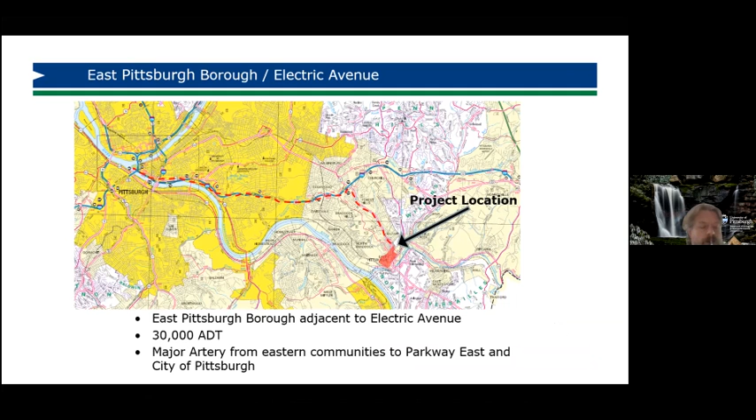And just for those of you that might not be familiar, this is in East Pittsburgh Borough, which is about 12 miles east of the city. Route 30 is a major thoroughfare for commuters, maybe not so much now, but they have 30,000 cars a day travel to and from the city. So I'll give you a little bit of brief background about the project.

Gannett Fleming has an open-end geotechnical contract, on-call services for the Pennsylvania Department of Transportation. They had been investigating a suggested subsidence condition out on Route 30. We were asked to come out and assist them with what was going on out there. So we spent a couple days, and within 2 days we identified that a retaining wall and the slope were displacing and it was not a subsidence event. We had some lateral displacement in both the slope and a mid-slope retaining wall.

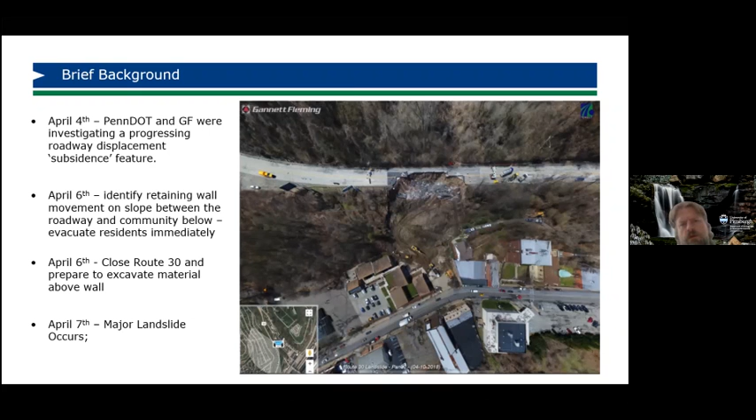So we immediately evacuated all the residents below in the local community, and then within hours of the evacuation, a catastrophic landslide occurred. Now, we won't go into the specifics of the landslide here. I'm going to concentrate on the technology used to accelerate our design and remediation. And like I said, here's a view of the slide.

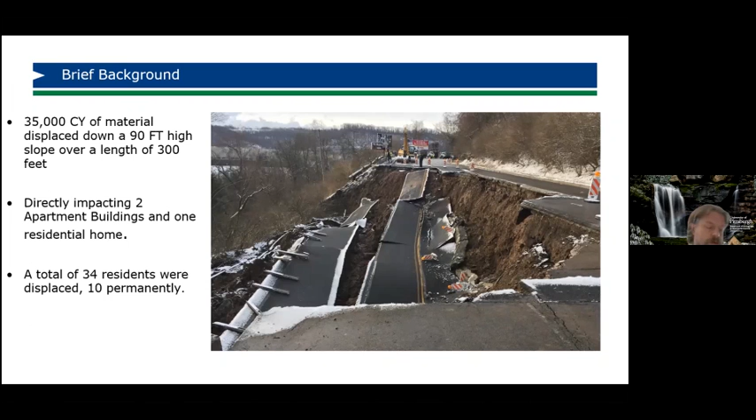35,000 cubic yards of material cascaded down over the slope, 90 feet high, and directly impacted 2 apartment buildings and severely damaged 1 home. Overall, a total of 34 residents were affected and 10 were permanently displaced. So what do we do?

Immediate actions. PennDOT has, again, an emergency contractor on call. They came to the site actually the night before it failed, when we were attempting to unload the slide at the roadway, and they began excavating material, but unfortunately the slide occurred too quickly, and so we went basically from an investigation to a remediation design.

Immediately the contractor switched from excavating the road to excavating landslide material, carefully going through some of the residents' belongings, etc. We also had PennDOT's on-call emergency drilling contractor on site, and with the excavation contractor and the drilling contractor, they began to do core borings throughout the slide.

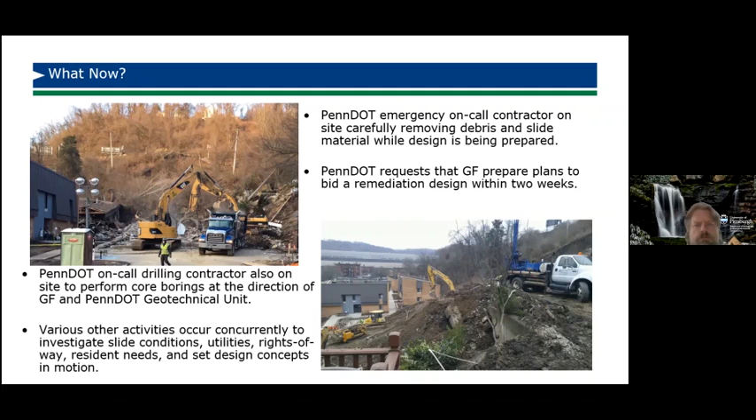And based upon some conversations with PennDOT, we had committed to put together the best set of plans that we could to remediate the slide and begin construction within 2 weeks. And there were other things going on like utility relocations, traffic detours, public relations, and of course the resident accommodations.

Now, for some of the technology aids we used to help us accelerate the project, as with the majority of our emergency slide projects, we typically rely on readily available LiDAR mapping that is available online through PASDA. And I give you the link here for your reference later. These are great maps for studies, but they're not necessarily survey grade. They give you 1 foot contours of whatever the latest mapping is of the area.

And this occurred in 2018, and you can see here the map was developed in 2006, so it's a little bit dated, which may be a problem in rapidly developing areas, but they were adequate based upon our reconnaissance of the site. The landform hadn't changed. So basically, I called the office, they downloaded the LiDAR cut sections, and they were laying on my desk that night when I got to the office.

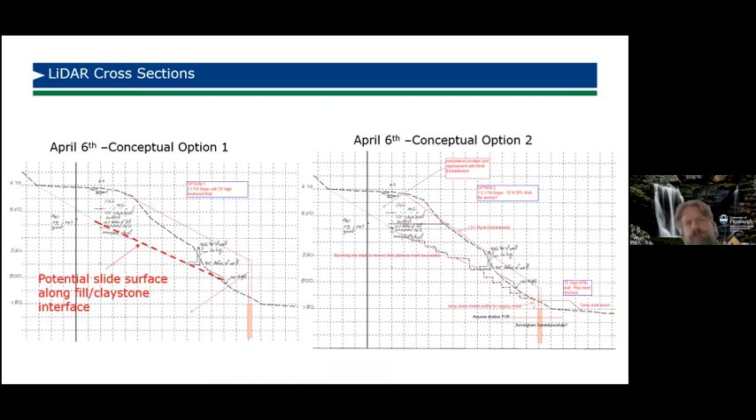So what did I do? I used the PASDA mapping. Here's the cross sections that we cut that day, and included information from the 2 partial borings that we were able to complete prior to the slide. And I put some interpretations on there based upon my reconnaissance over the 2 days on site, and came up with some general sketches of remedial options that we could pursue.

So although technology may assist you with advancing designs more efficiently, I just want to put it out as a reminder: the basis for a sound geotechnical design always begins with an understanding of the site history, including the underlying geology and the geologic hazards.

Now, fortunately, several of these resources are now available online through PA DCNR Geologic Survey and the new Allegheny County landslide portal. The links are right there at your fingertips. And you also want to look at any previous site development records or core borings that may be available from the owner or a local municipality.

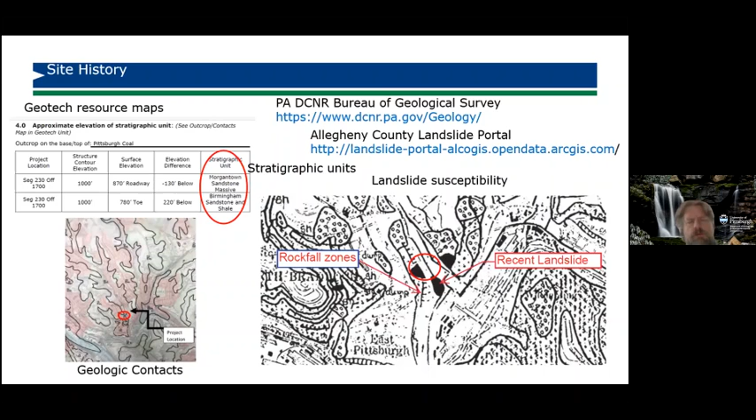Okay, so what do we do? We actually used drone technology to collect current site mapping. Gannett Fleming owns a drone. We had it out there within a couple of days, and the UAV collects photogrammetric views of the site, and then from there we can develop very dense 3D point clouds suitable for creating a final design digital terrain model.

The technology was very useful on this project given the unstable ground conditions and the steep terrain. Conventional survey would have taken weeks and would have put surveyors potentially in harm's way. One note of caution when using drone mapping, it must be tied to ground surface control points obtained by conventional survey in order to position the terrain model at the correct global locations. That way, mapping shared amongst survey teams can use the same controls, and we ran into problems here. That's kind of why I bring that up. I'll talk a little bit about that later.

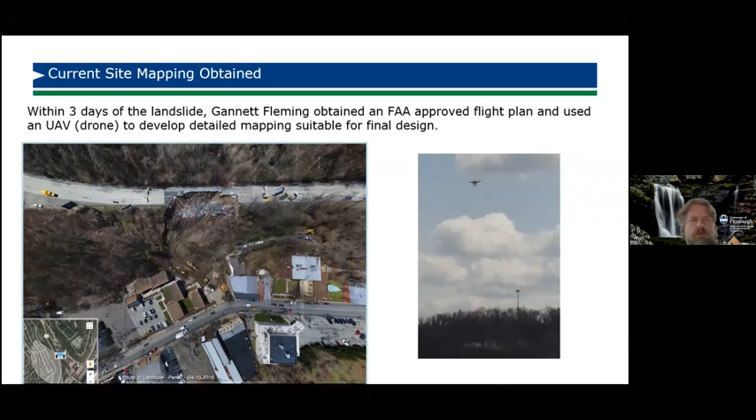So here we are using this available technology. We now have mapping of the pre-slide conditions with the LiDAR surface and the post-slide conditions within 3 days of the failure using our drone mapping. And this was very helpful in developing the geometry of the slide, identifying the magnitude of both vertical and lateral displacements.

Now, some of this technology that I'm presenting is now commonplace, and as Jim mentioned, 15, 20 years ago would not have been possible. Now, this stuff is widely used for social media, but we also found that these applications were instrumental in advancing our subsurface data collection and design.

We had core boring logs photographed and emailed to the engineers in the office as the data was collected, and core samples were photographed and sent via text with discussions of material, and termination guidance could be provided by the design engineer or modified in real time if we weren't hitting the material that we were anticipating. We could extend the boring. We didn't have time to go back, so these were very instrumental tools.

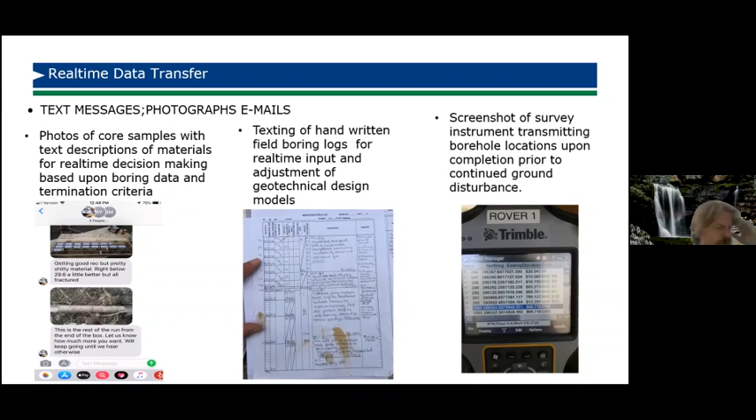The field survey of the boring locations was very important in real time because we had the excavators out there removing landslide material, and they were creating temporary benches for us to access with core boring equipment. And then as soon as the core boring was finished, we'd have the surveyor go over there and pick up the location and the elevation, so we could use that for developing our subsurface model. And then the excavators would come in right behind us and take out the temporary bench that they had installed just for the core boring operation.

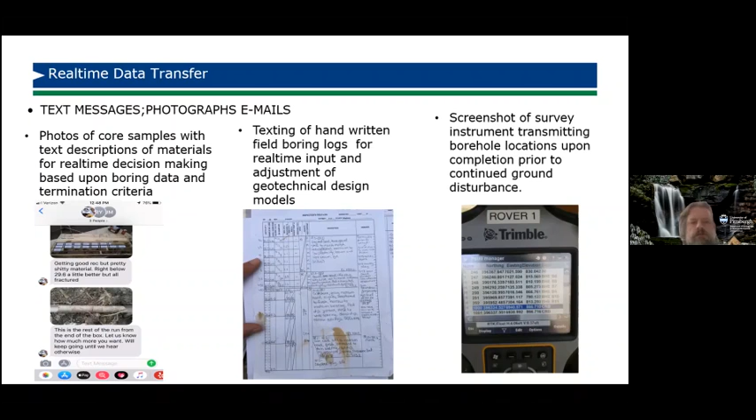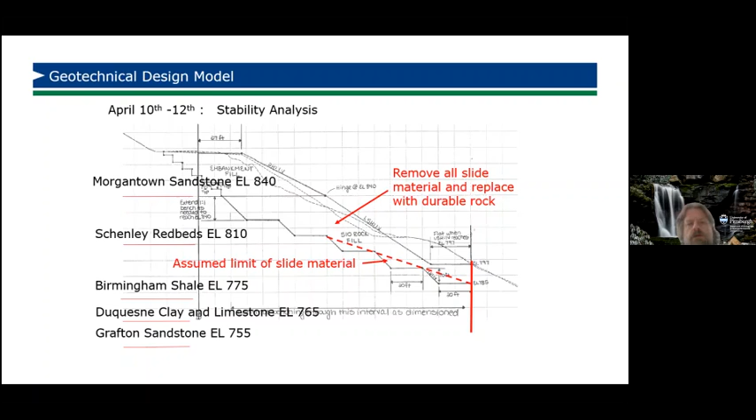So the use of all this technology, along with the nonstop around-the-clock efforts by the design team, PennDOT, and the emergency contractor, allowed Gannett Fleming to fully develop a geotechnical design of the slide within 5 days. And this is just a typical section with the geologic cross-section and the ground surface and some sketch of what we were thinking about as far as a repair.

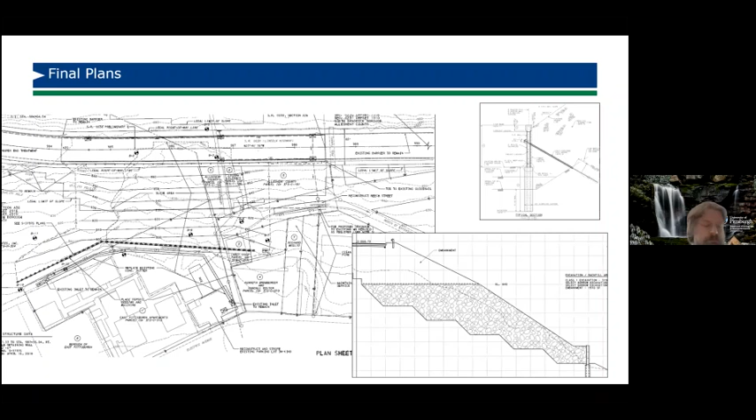And this is just an overview of what we actually designed. We excavated most of the slide material, replaced with a durable rock buttress, and erected a 20-foot high, 400-foot long anchored soldier pile wall socketed 20 to 25 feet into the basal sandstone, and installed 100 kip anchors, also bonded 15 feet into the sandstone.

So the contract was awarded, and Golden Triangle came out, and the first thing they wanted is our electronic files. So they requested them from Gannett Fleming, and they used our DTM to prepare an excavation benching model electronically, and the model was then uploaded onto a machine grading guidance system on all their excavators. So the models allow the equipment operators to determine in real time the excavation depths and positions, assisted by GPS locators mounted on the equipment.

Just real quickly, you see us standing around there on the one excavation bench. We asked the foreman, okay, I have the drawing in my hand. Where are we? So he had the equipment operator come over, put the bucket down. He said, okay, what elevation are you at? He could tell us right there on the spot whether we were at the design grade, above, below, etc.

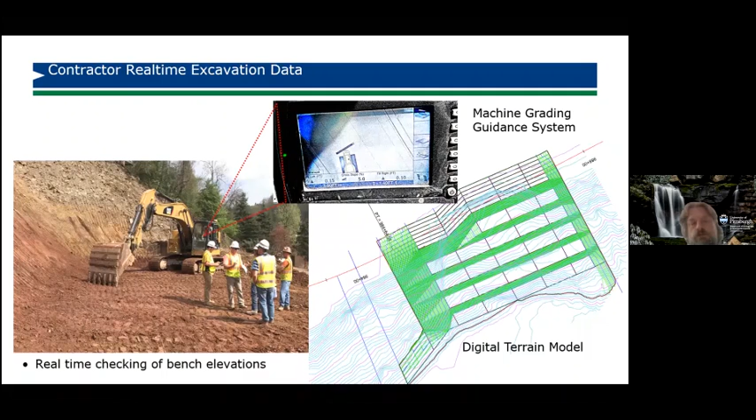Now, once that was completed, the geotechnical staff also had to go out and field verify the plan limits and modify the actual limits of removal based upon our visual observation of any remaining colluvium or slide material. And this photo just basically shows that we had to cut an additional 5 feet out of the design bench to remove some colluvium that still remained within the center of the old valley.

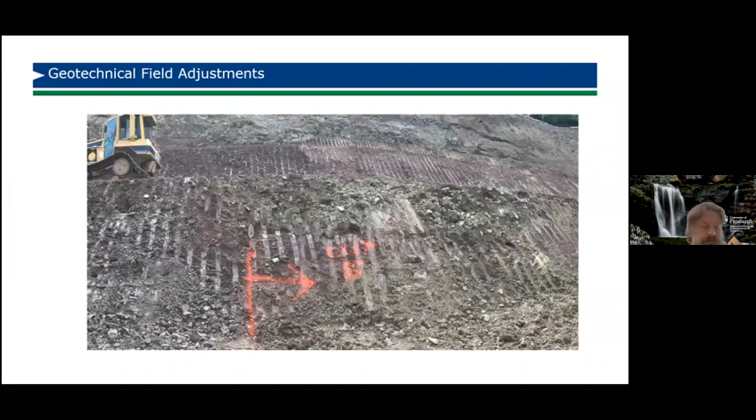Now, some of the other technology that was used during construction was also drone related. They used it as a construction monitoring tool. So Identified Technologies of Bridgeville provided UAV services. The drones were flown periodically to generate 3D maps weekly to track the progress and quantities for progress payments.

And this is where I go back to all these technologies, or the survey instruments specifically, have to be tied to common reference points. They didn't tie to our reference benchmarks or the contractor's, so their DTM model was slightly different than ours, so we couldn't track them exactly. But if they would have got on our monitoring points... there were some minor discrepancies, but that's just kind of a lesson we learned along the way.

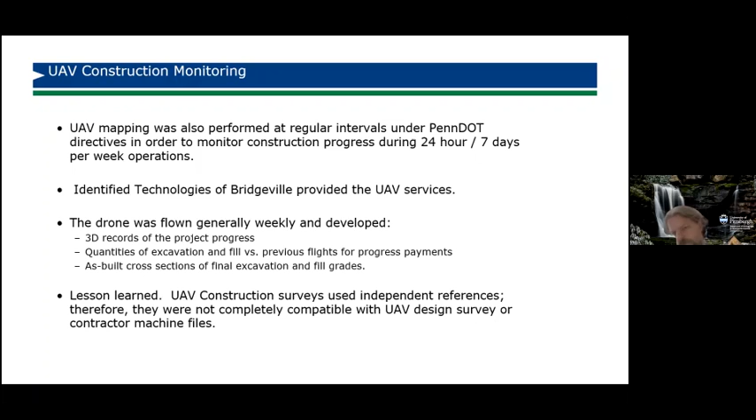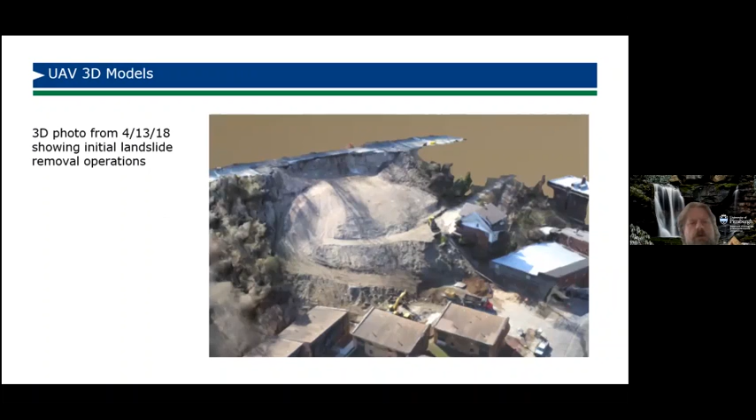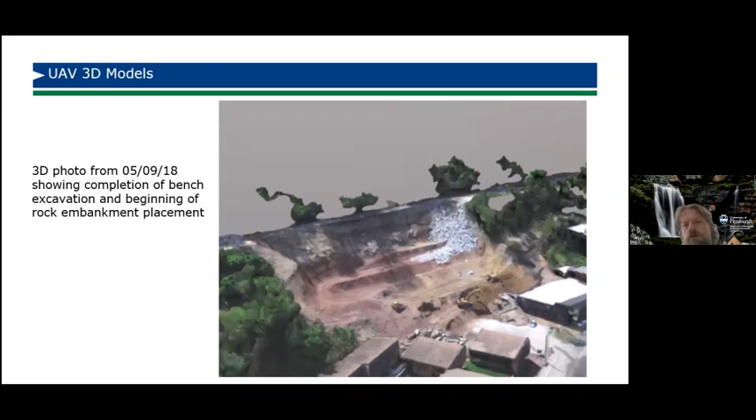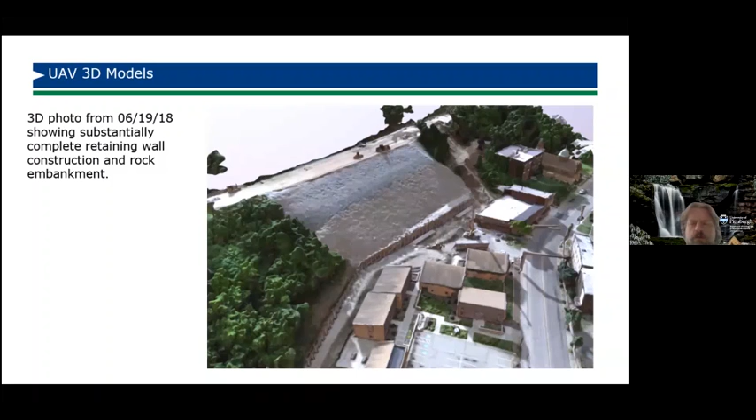These are actually 3D images. And this is a 3D image of the rock embankment placement and retaining wall construction. And finally, here's an image of the completed earthwork. Now they take these images and convert them into contour plots. The contour plots can then be compared through 3D computer models to evaluate change.

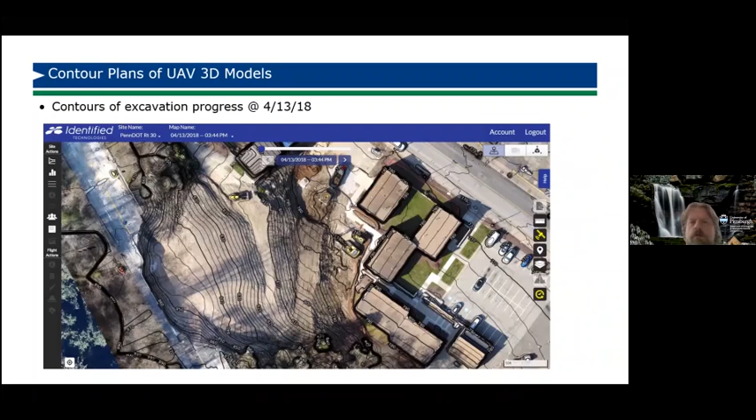This is a contour of the beginning again. Here is the completed bench excavation contours, and then finally contours of the completed earthwork. So they take this information and they can track volumes, areas, quantities, production rates, etc. And now they have an example. This is an example cross section; this was the original ground. Here's the excavated grade, and this is the final grade with the retaining wall at the toe.

And the comparisons also enable the contractor to evaluate the amount of resources needed compared to the completion deadlines. If they're behind schedule, they need to run more shifts, add equipment and manpower, etc. So they can evaluate that basically in real time.

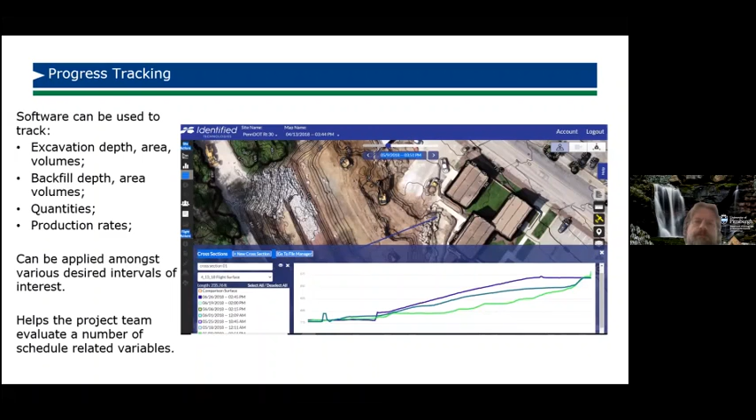Ryan, just a note, you're at 15 minutes, so if you... Yes, sir, I got 2 slides to go.

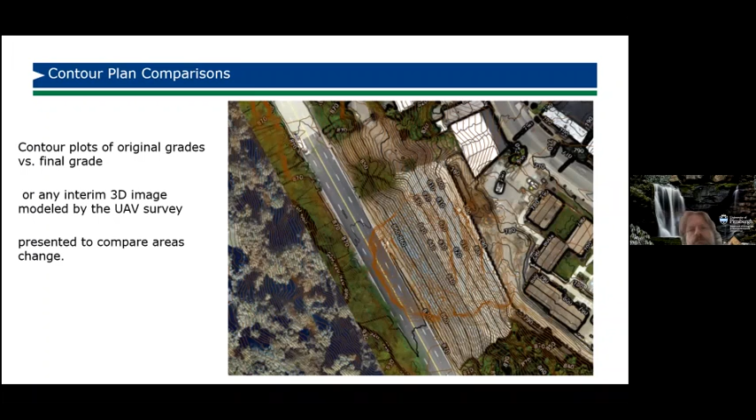Great, thanks. This is just a picture comparing the contours of the actual slide from Deanna Fleming's mapping versus the finished product contours that were made during construction. So just to show, it's a very useful tool.

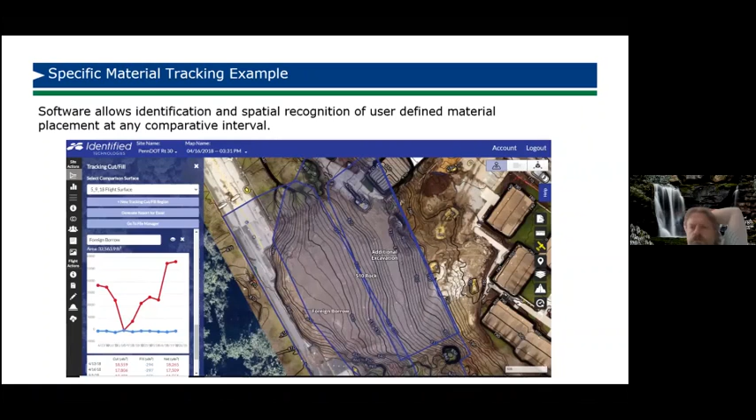Just one specific example here I wanted to show you: you can use this tool basically to track specific areas. They had specified materials going in here, foreign borrow. And you can track this versus time. This is actually the beginning of the project here. This is excavating in that area. And then this is actual placement of the foreign borrow material. So you can track how much and when the material was placed. So it's very adaptable upon any user setup. I think that's all I have.